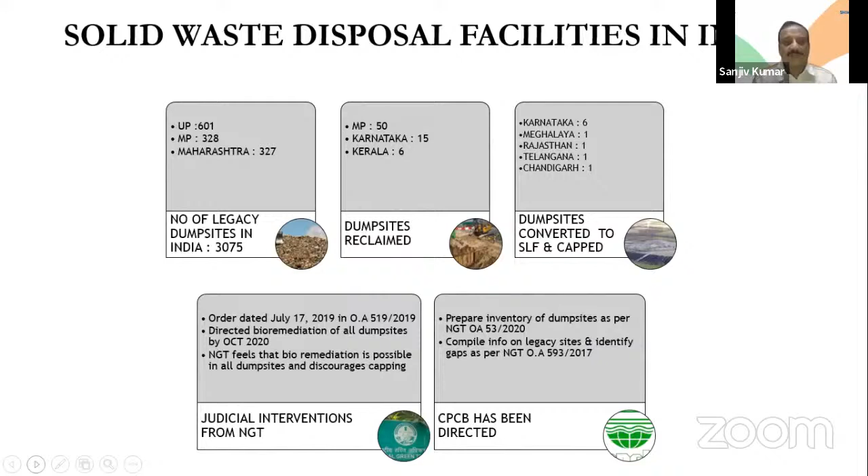Can we go to the next slide please? Just to highlight the problem, the Ministry of Housing and Urban Affairs said that more than 1.114 billion tons of waste is lying, across 472 cities with 517 dump sites.

These are only presenting cities greater than 20 lakh population. So this data shows the scale of the problem.

Under the solid waste management rules, it talks of bioremediation and who are the potential responsible authorities. Obviously the local body is the authority, and it says capping is permissible only in the absence of potential for biomining and placement of residues in a new SLF.

It clearly says any dump site can have a new SLF, but it should be a scientific or secured landfill, with capping using geomembrane, cutoff walls, or other methods. This requires providing a total number of dump sites and related information. So the inventory is the responsibility of the local authority, and bioremediation and capping was to be completed by March 2021.

The timelines have also been defined, and what actions are to be done by the ULB is clearly mentioned in the rules. In compliance with the Honorable NGT, guidelines were to be prepared.

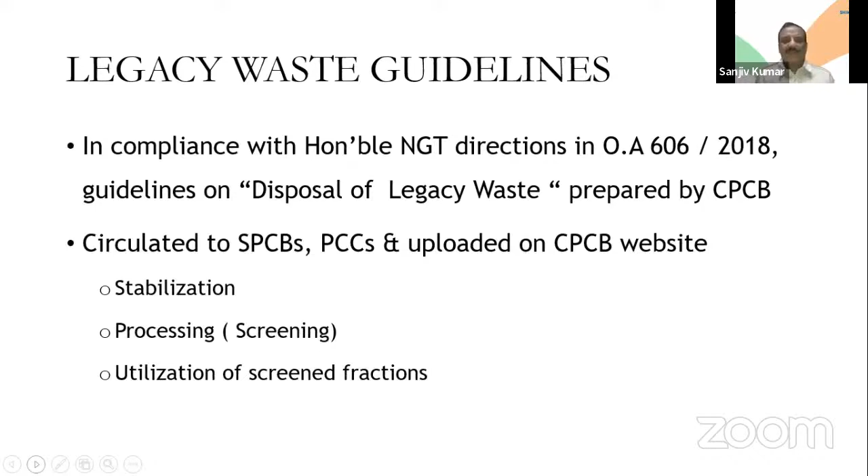CPCB has prepared the guideline, and it has been uploaded, covering stabilization, pre-processing, and utilization of the screen fraction. NGT has also been quite vocal and directive in terms of what should be done and where it should be sent.

NGT believes bioremediation is the possible solution, either ex situ or in situ. It says the option of capping legacy waste, which has huge environmental and health consequences, is no option at all, except for inert waste, which is to be disposed of in a scientific secured landfill.

The problem here is that the definition of inert waste has not been defined. So what is the utilization of the recoverable material has also not been defined. And there is no enforcement on who should use it, because whosoever is doing it, whether it's the ULB or some other identified person, they should be very clear on what should be done.

It also says bioremediation and biomining should be the preferred option. Cities with more than 10 lakh population need a localized solution, though this localized solution has many things that lack clarity. It directs ULBs on legacy waste as well as existing operational dump sites, restoring them to pre-existing ground levels through a process called bioremediation, and the definition of bioremediation and biomining has been clearly defined.

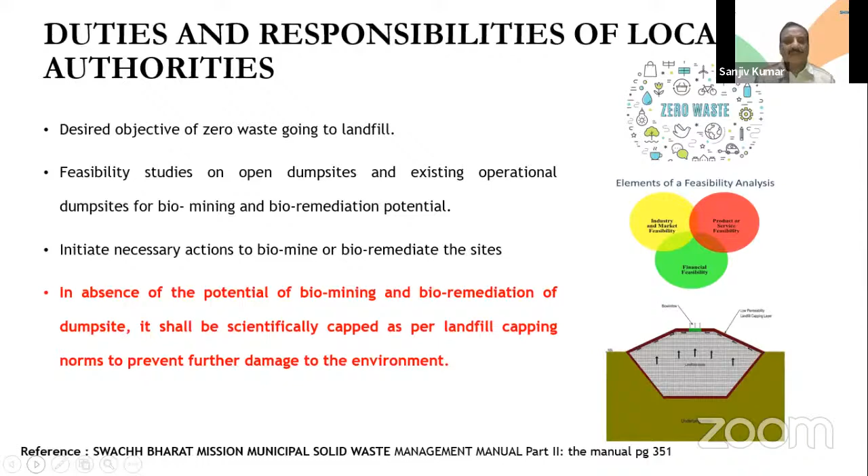Impacts are very high. If we take Delhi dump sites, all along there is either the Yamuna River, the Hindon Canal, or the Najafgarh drain. The impacts in terms of groundwater, water pollution, and air pollution measurement are contributing heavily, whether they are catching fire or in terms of PM 2.5 or SPM levels. So those impacts are very high, and there is a requirement to assess how transportation activities and dump sites contribute cumulatively to rising air pollution.

Let's go to the next slide.

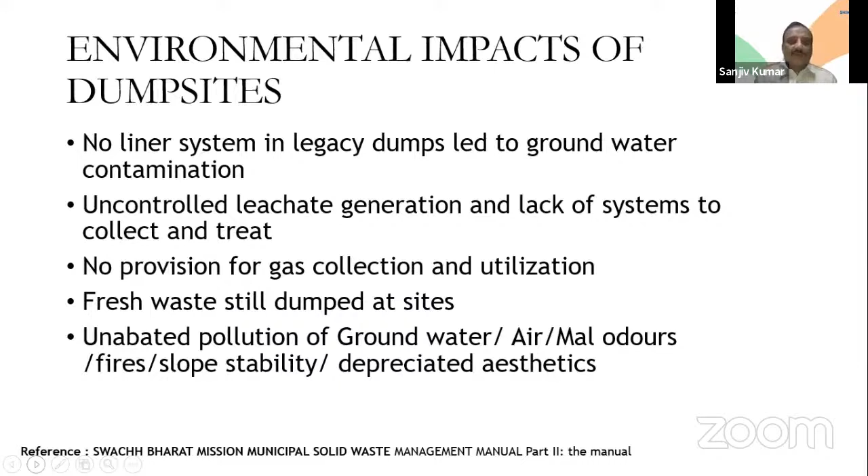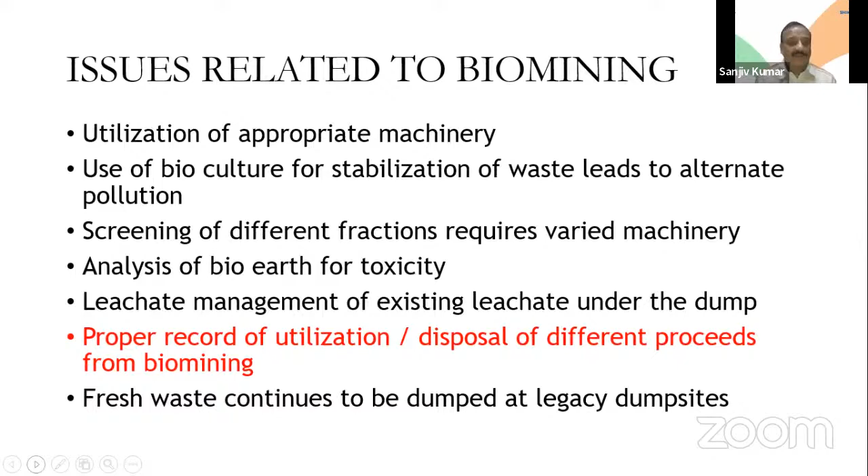Proper record of utilization and disposal of proceeds from biomining - this is one very important thing. Whether it's Ramky or any ULB, a lot of case studies have already been done. We should be in a position to document where this has been utilized, whether it has actually been utilized or is just a shifting of material. Fresh waste continues to be dumped, which adds to the further problem of executing biomining projects.

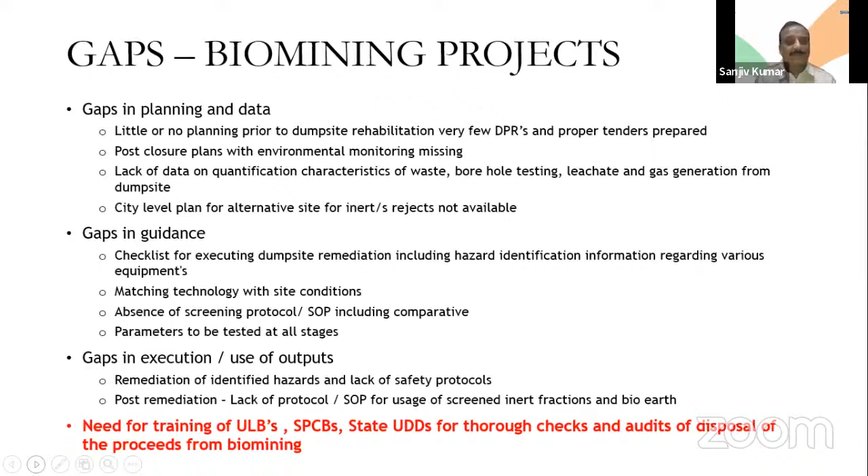A lot of cement factories are there, and boiler operations across every city need some fuel from one source or another. The RDF generated, if it has to be used, there should be enforcement ensuring its use. Probably some amendment will be required to the boiler or fuel incineration design of the equipment, but that can be done.

Why should they not be benefited with this kind of outlay, so that they stop using the regular or natural source, whatever they have been using, whether coal, fuel, wood, bagasse, or any other material. But if this RDF is being used, it should be used properly.

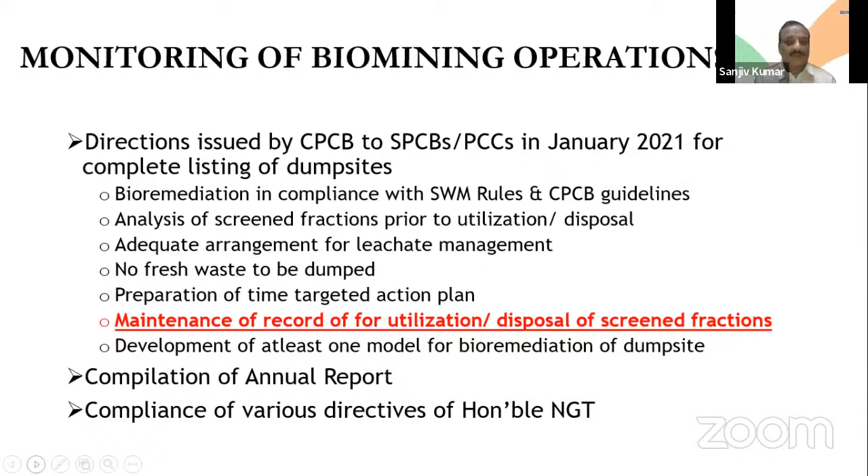Right now, I think it's important to understand that as on date, there are almost 170 tenders out for biomining remediation, and the value of the tenders ranges from 10 to 12 crores each to 650 crores. So if I take a lump sum of 100 crores or so, it's skewed. More than 11,000 crores of rupees is under the tender stage where such work is going to be done.

Whether that money will be properly utilized is a question that needs to be assessed, because to us it now looks like relocation of one dump to another. In the case of Delhi also, we are being told that the tender stocks exist, and we have been debating with the authorities of EDMC and South Delhi Corporation, saying, sir, please give us the place where it should be dumped.

We can't reclaim the entire Ghazipur dump ground or Okhla or Bhalswa. A lot of money is being used just to shift from one location to another. So we are blatantly saying it is not a relocation of the dump site, it's a complex activity. It's like an abscess which a human body has, and that abscess cannot just be given to some quack or treated casually. It is a complex technical solution.

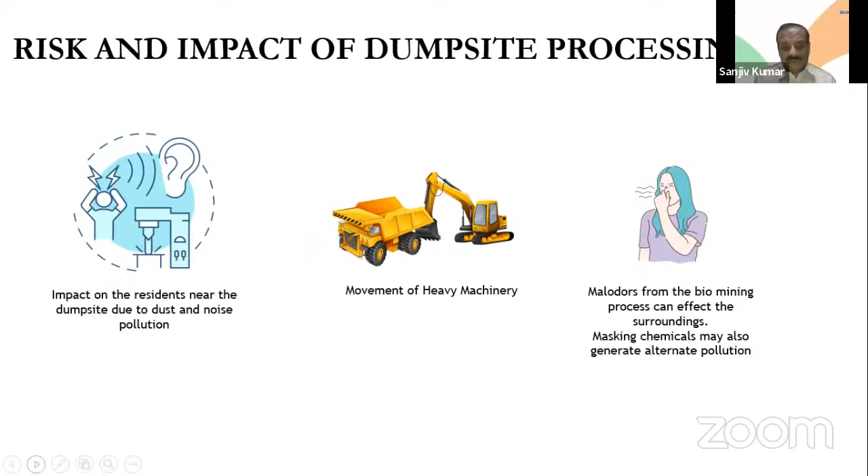Dump sites have an impact on residents due to movement of heavy machineries. This is a very critical activity because any dump site requires huge amounts of different types of machinery with proper base and proper working, which must be looked into as part of the technical process. During this process, safety, health and environment have to be considered. It generates a lot of odor, which impacts the workers and obviously the surroundings.

Technology selection is very important and is based on the waste composition. Each dump site cannot be the same. A dump site in a small town with 5 lakh population differs from a medium town with 30 lakh population, and a million city like Delhi, Kolkata, or Chennai has a different type of waste characteristic. So everywhere it cannot be the same.

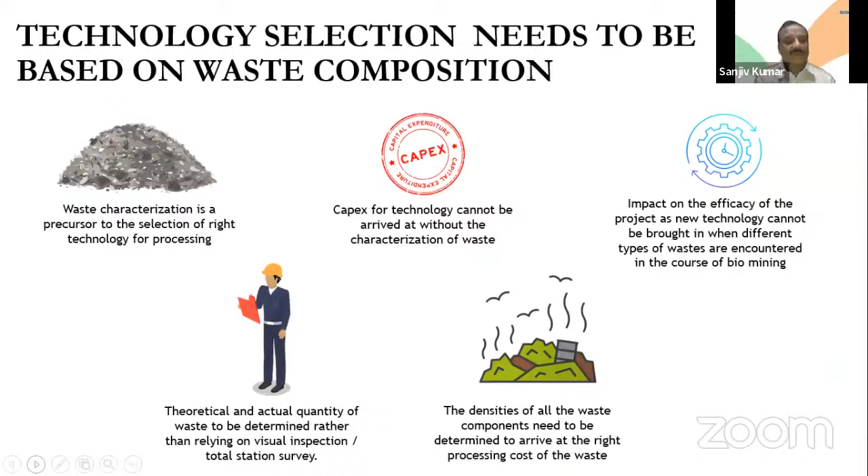Capex is also very huge, like a running capex, because machines have different requirements. It impacts the efficacy of the project—theoretical data is given about how much truckload there is, but when you look at the ground reality, either in volumetric analysis or tonnage terms, it does not match. Moreover, depending on the type and the different phases in which dumping has occurred, the densities and characteristics of the waste vary greatly.

So a lot of technical requirements are done. We have done a lot of work on how the works can be taken up, characterization into small, medium, economics of scale, transportation. Transportation is very important here, because when we shift from one place to the other, in place of lifting of the inerts, it generates ecological footprint in terms of gaseous emissions, cost involved, and contribution to localized transportation. This needs to be properly assessed while defining a project contour.

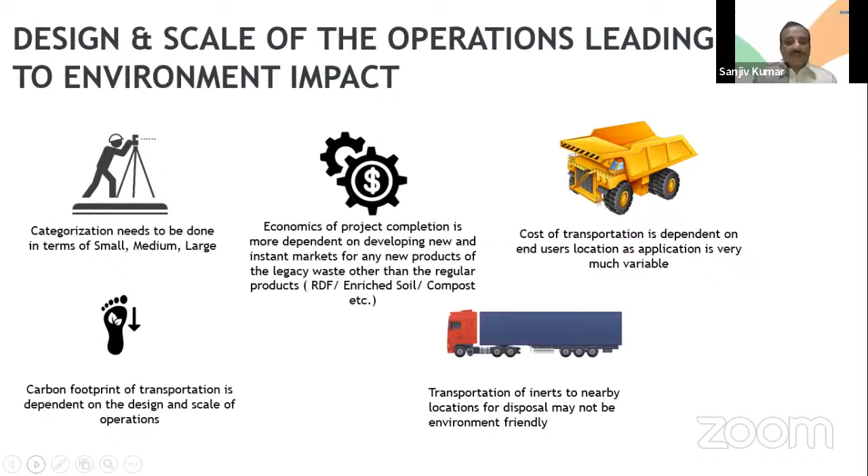The parts of the biomine product generally come in the form of compost, in very little amount, because the organic fraction conducive for good manure is reduced over the course of time. There is a potential of RDF which generally ranges from 12 to 15%, or maximum. In some cases where the fresh waste is there, it goes up to 25%. And inerts are very high.

Recyclables are almost negligible, because by the time old dump sites have already been picked up with all the recyclables, either informally or formally. So the maximum amount comes as a part of the inert. Now the quality and quantity of the inert, where it should be disposed and what quality has to be acceptable, is a scientific study which requires a lot of analysis, and it's more than 70%.

There is certain RDF material or fresh waste that can be used for energy recovery, and if that energy recovery is done in situ, with putting up a kind of CBG or biomethanation or waste to energy plant, it requires a big capex. But those things have to be built in, and proceeds from the legacy waste can only be determined through scientific characterization of the waste.

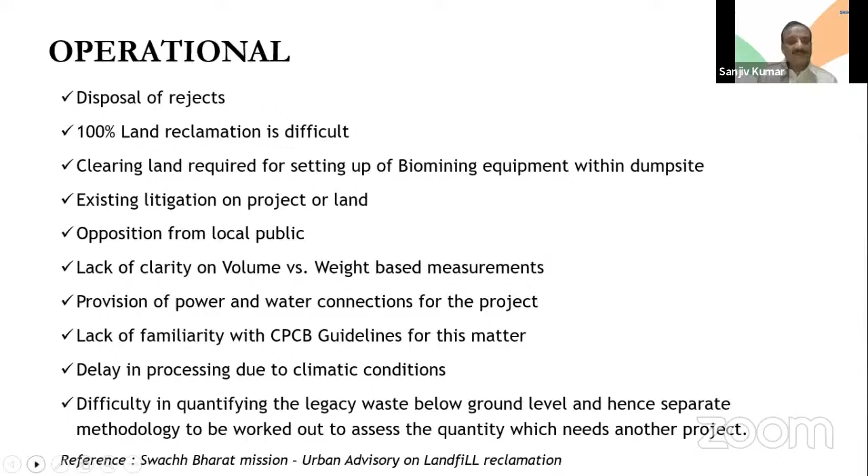For smaller ULBs, less than one lakh, farming areas are close so that mined soil enricher can be taken up by the farmer. But the logic here is, this was dust, this was garbage - whether I should take it or not. So some kind of confidence building with the government is needed, giving assurance that yes, if this is the waste, or if this is the quality of the inerts, then it can be used. So farmers do not want it. In fact, in a few places, authorities are asking us to put it into the open cast mining area, but that cannot be done without legal or technical backup. Inerts should be used by ULBs for citizens in building activities.

Generally, if I take Delhi or Hyderabad, a lot of drains are getting constructed with footpaths being made. These inerts can always be used for those footpaths and utilization of this area, but there has to be a backup. Why will PHED or PWD or Delhi Jal Board, or their contractors, when they build a contract, why should they take it? Generally they are doing it, but these are not documented. So these are the problems.

Transportation of RDF from ULB is one of the biggest problems. The volume of the waste or RDF is very high but the weight is very low. So a truck of 15-ton capacity can only transfer something like 7 tons of RDF. This is a volume game. So the cost of operation, for example, is say 5 rupees per ton per kilometer - the cost here becomes double. And if the number of truck movements becomes very high - there's no cement plant within a vicinity of like 300 kilometers, the nearest cement plants like in Delhi or Hyderabad are roughly around 300 kilometers - so the cost of transportation goes up. These are the issues where the quality of the bioearth has not been defined. What should be taken to the farmland, what should be taken for inert making, has not been defined.

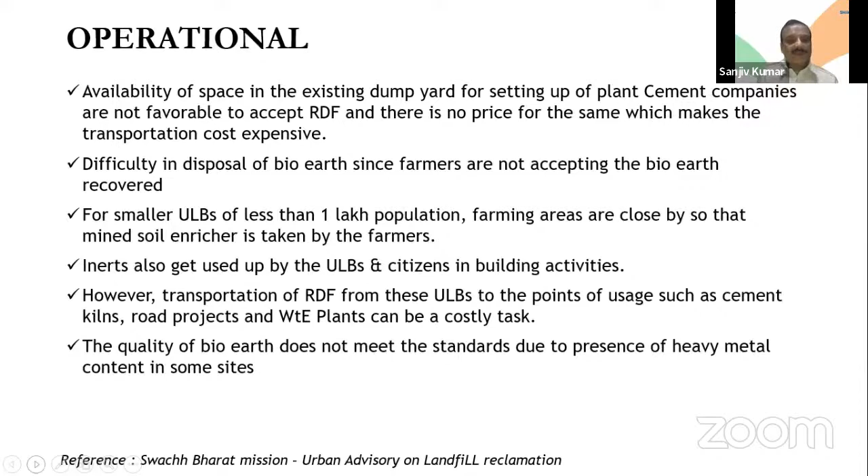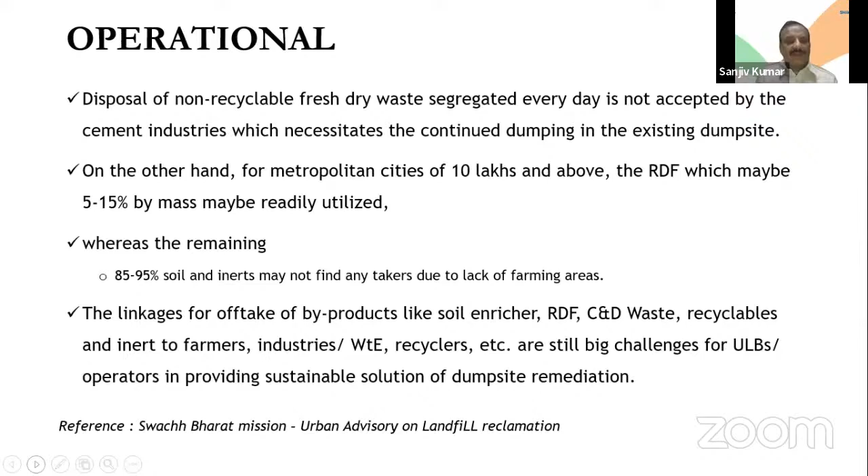I think all these have been the linkages of offtake for soil enricher which are still challenges. The ULB needs to come out, or the statutory bodies need to make it up for that.

I have explained all this - infrastructure, machineries are not available, contractual issues, lack of experienced people working in this. The quantification of legacy waste is volume based, and cement companies are reluctant to take refuse derived fuel for the contractor.

I think Dr. Saha has just raised a point here. It's very clear - any cement plant generally spends roughly around 3,500 rupees per ton for coal intake. This is free of cost, but the cost of transportation from one place to 250 kilometers is more than 4,000 rupees per ton. Now, whether we want coal to be used or whether we want RDF from this legacy waste to be used is a direction which needs a technical study. How will be the cost benefit in place of coal, and what benefits are we getting? Those kinds of directives should come as part of technical expertise. We are only talking of economics per se, but the benefits which are coming because of saving coal with RDF - the cost attached to spending on RDF is higher, and that too only on the transportation I am talking of, sir. So these are the things - there are so many aspects which need a lot of cost benefit analysis. We are open to discuss and share that, but these are the ones I'm just telling.

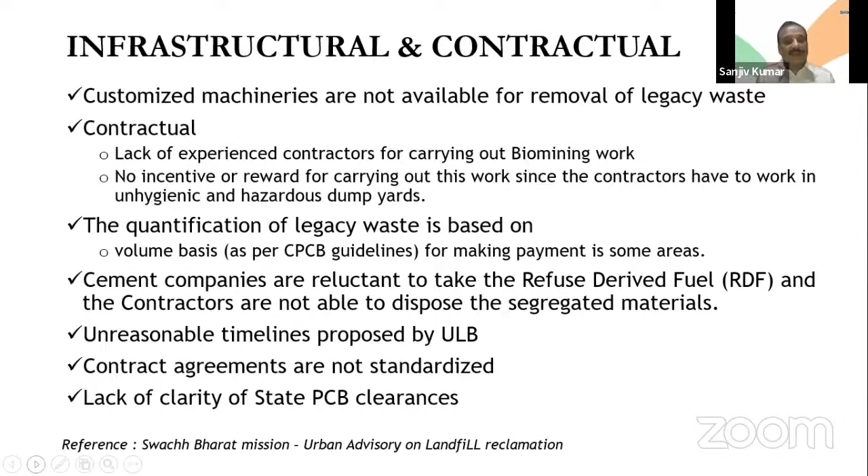Lack of clarity on SPCB's clearances - there is no role defined for what the role of SPCB will be during such projects. We strongly feel the role of SPCB in these kinds of projects, since this is just like a beginning in India, has to be completely an accountability-attached role. It can be a regulator, but when you do a regulation job and make up new kinds of such things, it has to be like hand-holding, because tomorrow the ULB and the contractor doing the work should not be held accountable that you have not taken care of the drain where your leachate was flowing out, and because of this leachate the quality has further gone downtrodden. We never created this - neither the ULB - there was no such problem there. And when I say we, it is not Ramky, it's the public. When we take it up as a public, we never created it. So clarity and accountability of the SPCBs along with ULB also has to be defined.

Generally, sir, with these kinds of problems, we think this is a bigger expense required, bigger focus required. So we say that it is under-budgeted, no grants or financial assistance from the government. I'll tell you, sir, the kind of approach the corporations are taking up - they are calling contractors saying please do the project, there are hundreds of contractors who are ready to do it. They all will be done.

Payment terms and methodologies, lack of applicability of GST - for this also there is a GST. The cost burden of transporting soil is roughly around 4 to 5 rupees per kg, and that too defines only 50 kilometers. And when you talk of inert transport to 50 kilometers, it has to be looked into whether that 50 kilometer capacity is actually there.